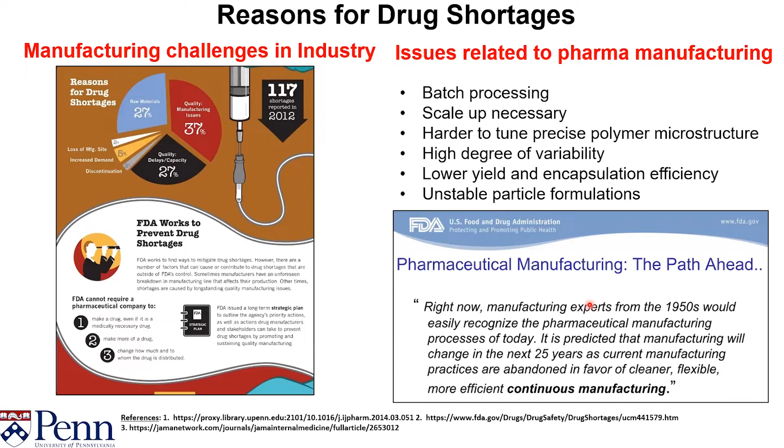In many cases, when drugs are produced, they're produced based on emulsion-based manufacturing processes. So emulsion, as you know, is a mixture of two immiscible fluids, such as oil and water. When you mix them, you get an emulsion, such as oil in water or water in oil emulsions. These emulsions can then be processed into particles, which can be used as injectables as well as vaccines.

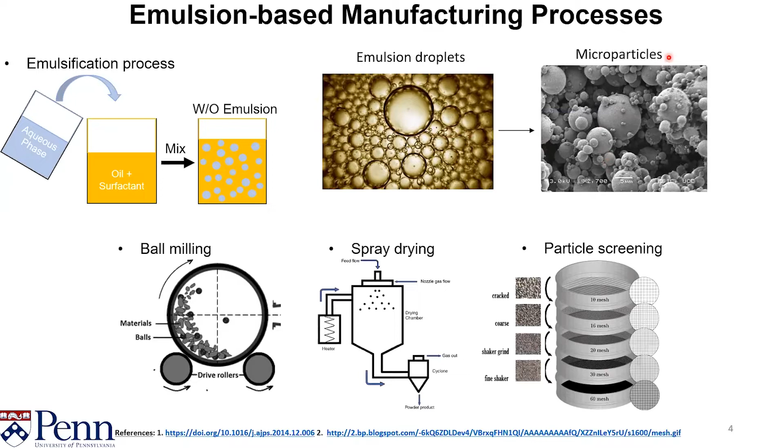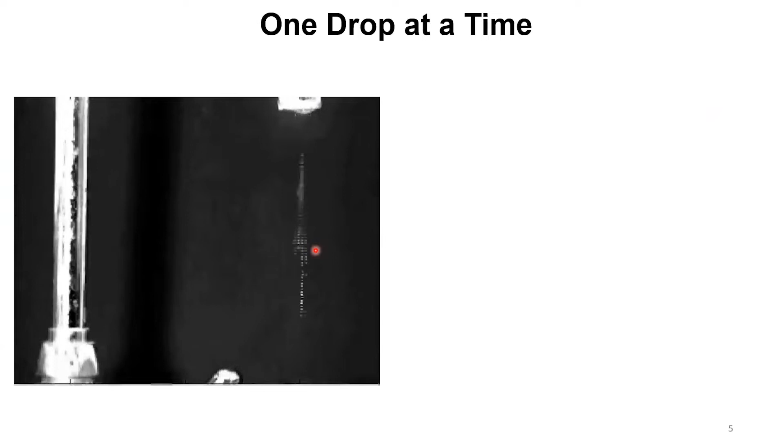Now, traditional methods of creating these particles using emulsions end up giving particles that are extremely heterogeneous, as you can see in this electron micrograph. So we and others have been working on making drug particles that are highly, highly uniform and homogeneous. And we get our inspiration from this right here. This is a leaky faucet.

What you see here is that every time a droplet grows, at some point, it will detach from this tap. And the reason for that is that as the droplet grows, it gains weight. And when it gains sufficient weight, gravity pulls it down. And this intricate balance between the gravitational force and surface tension leads to droplets that are always of the same size. And we do exactly the same thing, but at smaller scale.

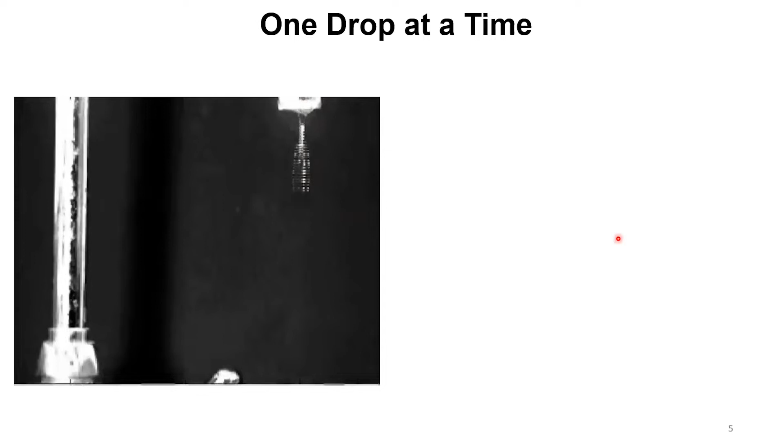So we create these channels that have dimensions of sub-millimeter. They're typically tens of micron. And we can now create these droplets one at a time. So here what you see is this is a tapered capillary sitting in another capillary. We have oil that is flowing through this gray area and water that flows around this gray capillary. And the oil gets detached and broken up into these droplets.

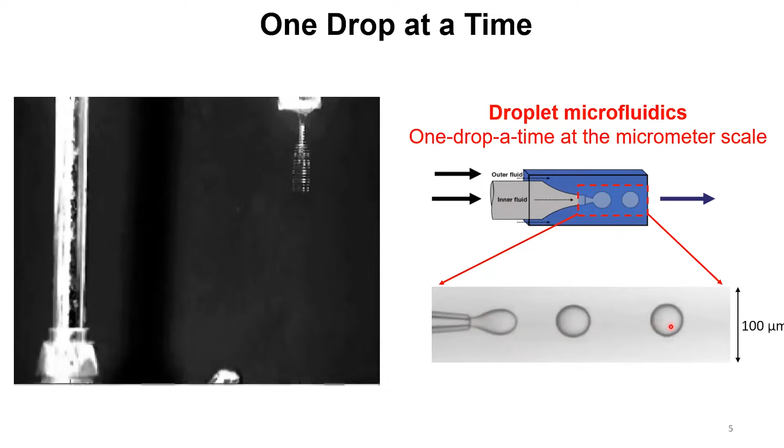Okay. So what's really unique about this droplet microfluidics is because you can control the flow of fluids precisely, you can create droplets of exact same size and also different morphologies. So people have been able to make these Janus type droplets.

Okay, I'm having some computer issue here again. So let me see if this is going to be okay. I'm very sorry about the computer issues that I'm having here. Okay. Okay, I hope you can still see my screen.

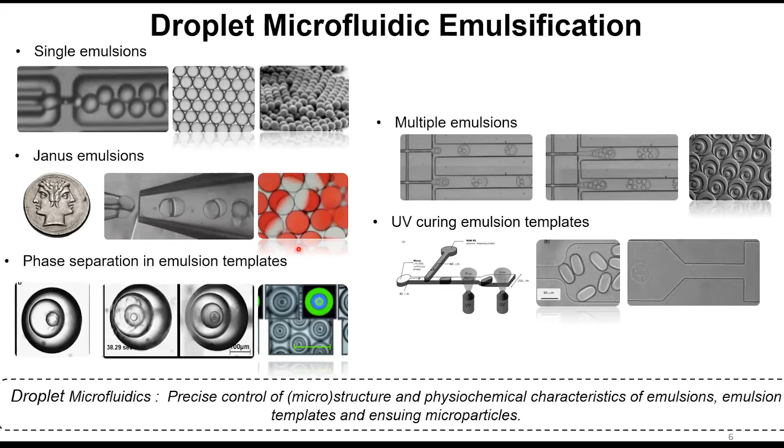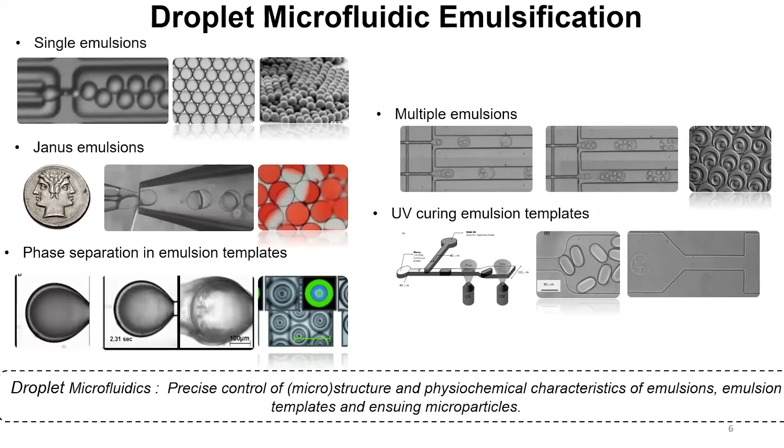So again, just going back to the droplet microfluidics, this droplet microfluidics gives tremendous control over the size as well as morphology of droplets. And the field has really taken off. So these days you'll find tens of papers that are published every week on using droplet microfluidics to create beautiful droplets that get used as templates for particle synthesis.

Now, there's a huge problem though. The production rate in microfluidics is extremely low. If you're doing 1 milliliter per hour, you're doing pretty good, okay? Whereas in industry, you typically need much, much larger scale. So if you are producing droplets at 1 milliliter per hour scale, to get 100 liters, you need 11 years. And no industry is going to use a technology that does not have the scale-up capability.

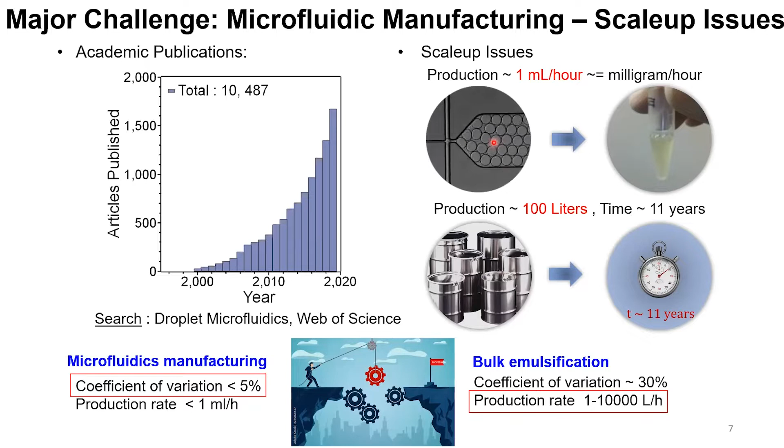So while the droplet microfluidics gives you the high uniformity and precision, it lacks the production rate that is required by the industry. So there's this gap between what is being studied in the laboratory and what the industry needs. And this is exactly what I wanted to address. Now, one simple question is, if the flow rate is so low, why don't you just increase the flow rate, right, to get to a higher production rate? And this is the problem, okay?

So if you operate at high flow rate, what happens is that you undergo this instability and you induce jetting of the stream. So instead of creating these beautiful droplets one at a time, you induce jetting. And by inducing jetting, you no longer have the capability to create these highly uniform droplets. While I won't go into the detail, the reason that increasing the flow rate induces jetting is because the shear force essentially overcomes the surface tension force, or inertial force of this dispersed phase overcomes the surface tension, leading to this jetting phenomena. So simply increasing the flow rate is not going to solve this problem.

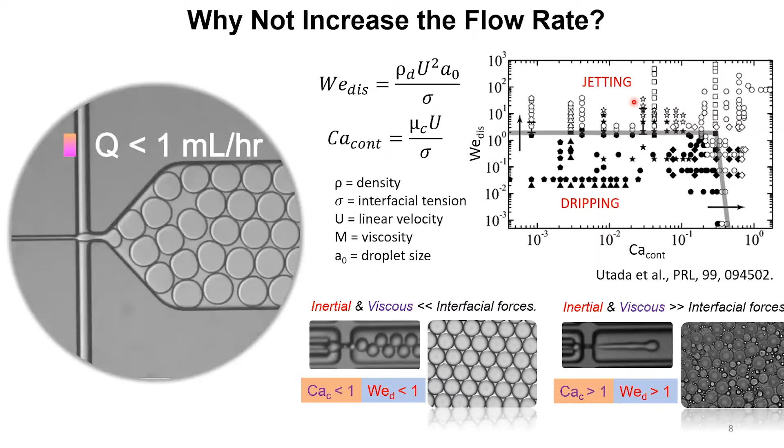So one simple way to scale up is to have many droplet generators work in parallel at the same time, right? So instead of having just one droplet generator, you can have 12, you can have 100, you can have 1,000 droplet generators. Problem with that is that each droplet generator will need some kind of liquid handling units, such as pumps. So if you have 1,000 droplet generators, you're going to need 2,000 pumps. And that's not a very viable way to enable scale up.

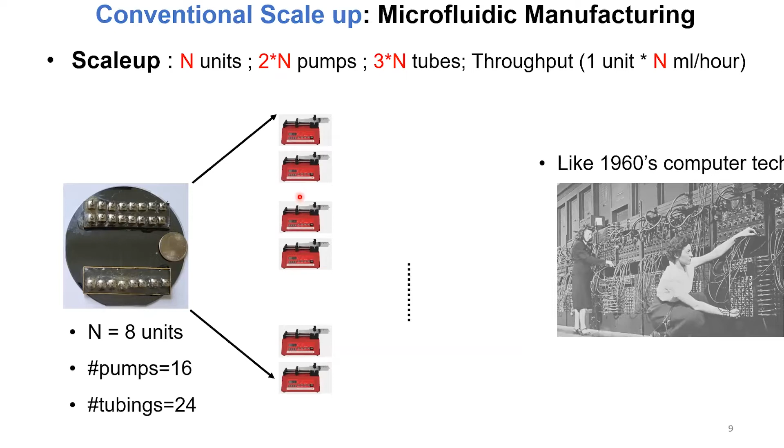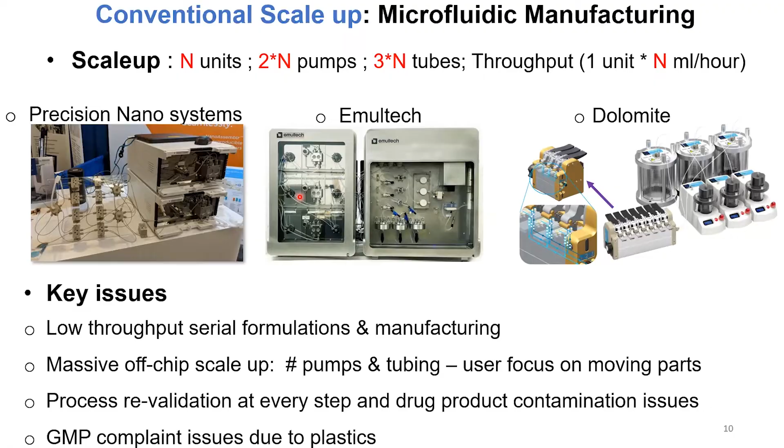Okay, but that's what a lot of companies are doing right now. There are actually several companies in this area that are trying to scale up microfluidic technology. The issue with this again is that because you're just scaling up by increasing the number of droplet generators, you need an equal number of liquid handling units, and there's variability from droplet generator to droplet generator. Okay, so we thought about this problem a lot, and we actually are very inspired by what happened in the microelectronics industry. Okay, so Korea is a very powerful nation in this domain, right?

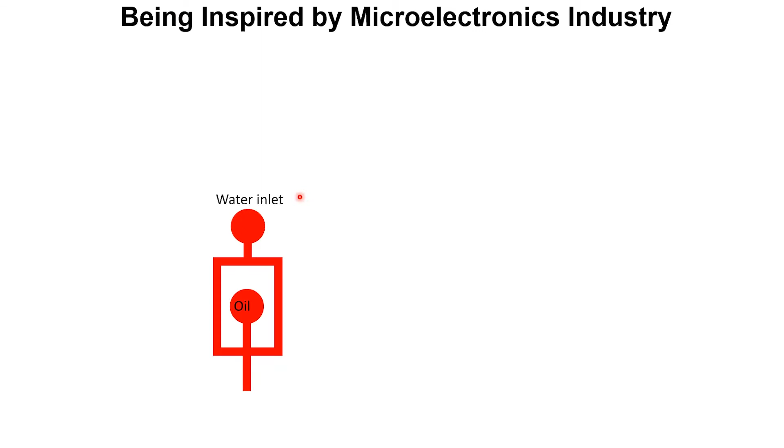Microelectronics is nothing but taking transistors. Okay, so this is a transistor that was actually first developed at Bell Labs, 1940s. And to go from here to these semiconductor chips that we have in all of our phones and computers, what needs to happen is that number one, these transistors need to be miniaturized, and then they need to be parallelized onto a single chip.

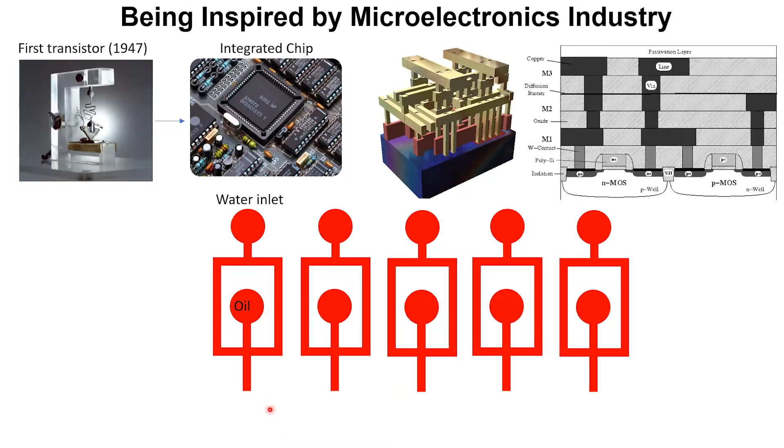Now, when this parallelization is done, it's done in a way that there's a single channel or conduit circuit that brings in electrons and takes out electrons. You don't increase the number of inputs and outputs linearly. So we basically take a similar approach where we have a droplet generator like this, and we parallelize it onto a single chip, and we connect these two delivery channels that will bring in water and oil.

And these droplet generators are all connected in parallel to each other, and they will generate droplets one at a time, and these generated droplets will be collected in this green collection channel. So that's the basic strategy. We are inspired by how the microelectronics industry was able to parallelize these transistors to create these semiconductor chips. We want to do exactly the same thing. Instead of controlling the flow of electrons, we are now controlling the flow of liquids.

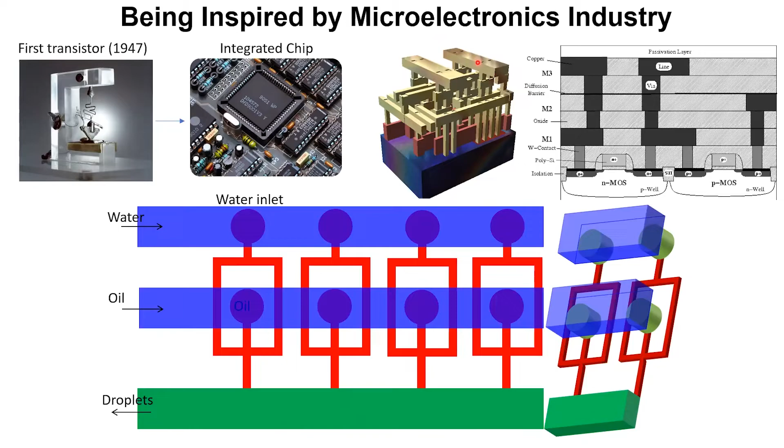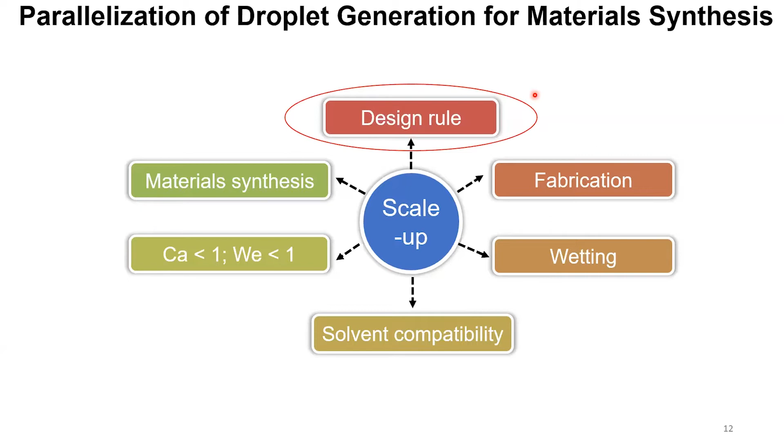All right, so basically to enable scale up by parallelization, there are several things that we have to consider. And I want to walk through this process step by step with you to show you how we were able to achieve parallelization and what the status of the field is right now. So the first thing that I want to share with you is, how do you design these parallelized devices? So I don't know how many of you work with droplet microfluidics. Maybe none of you do.

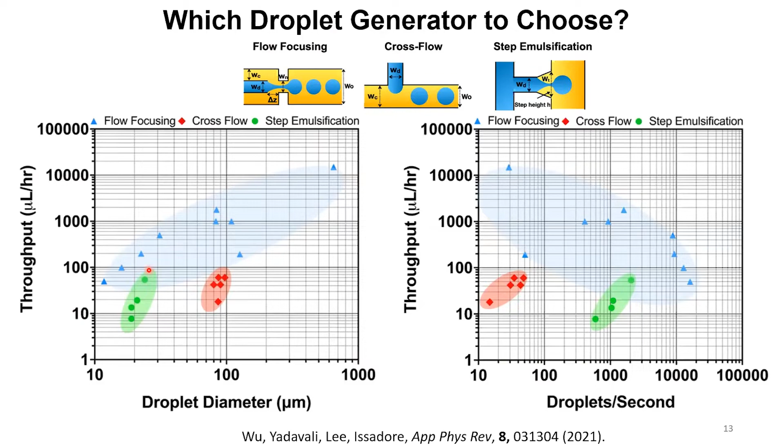But there are different ways of generating droplets in microfluidic chips. There are different droplet generator geometries, such as flow focusing, cross flow, step emulsification. Each geometry has its own advantages and disadvantages. What we decided to do is we decided to use this flow focusing geometry because, as you can see in these two plots, where I'm plotting the throughput per device as a function of droplet diameter, or how many drops one can produce per second, the flow focusing device gives the widest range of operation. So it gives the biggest flexibility in terms of producing droplets of different sizes, as well as different throughputs, okay?

And then now we have to parallelize droplet generators, okay? And there are two different schemes by which these droplet generators can be parallelized. So I want you to think about this, okay? One strategy is called tree network. So the liquid goes in and then it branches off into two channels, and there are multiple branching points. So it's called tree network. The other geometry that we consider is called ladder network. It looks like a ladder, right? So you've got two fluid streams that are coming in, and then there are these droplet generators that are connected to these two delivery channels.

Now, which design do you think offers more advantage in enabling parallelization? Now, the important thing about this is that every single droplet generator has to be fed with the exact same flow rates to be able to produce uniform droplets. So I'm going to tell you that it's actually the right-hand side that we decided to use. The reason for that is the left-hand side is very intuitive, right? Every time branching happens, you divide the fluid into two equal channels. The problem with this tree network design is that if there is a problem with one device, it completely throws off the balance among all the connected droplet generators.

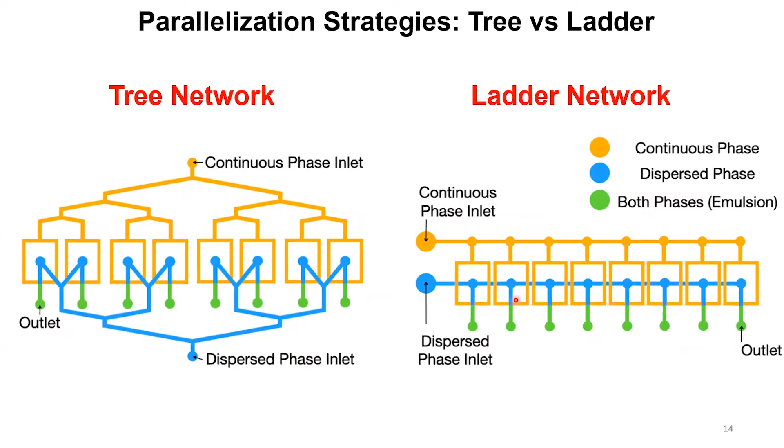Now, then how do you ensure that in this ladder network every droplet generator is being fed at the same flow rate? It actually becomes a very simple circuitry problem. So like I said, instead of controlling the flow of electrons, we are controlling the flow of fluids. But in the end, they have exact same physics behind them. So let's say this is a delivery channel. So this channel brings in water. And let's say these rungs of the ladder, so these vertical lines, each of them is a droplet generator.

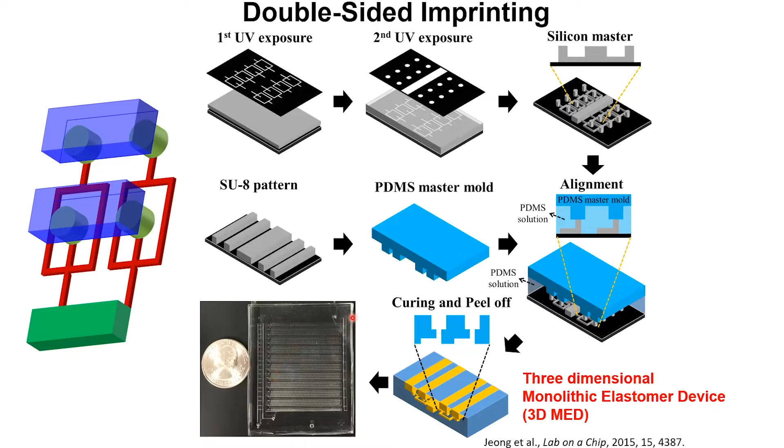So this device, which is about the size of a US quarter, approximately the size of a 500 won coin in Korea, has 1,000 droplet generators, and this is what they look like. So this is the flow focusing device that makes the droplet, and this is the big distribution channel that has very low resistance to the fluid. So the water and oil come through these big delivery channels from outside, and they're delivered to the flow focusing channel using these vias. These things are called vias. And this is what this device looks like when it's under operation.

So let me see if I can play this movie. All right, so what you'll see is that these droplet generators, 1,000 of them, are all working in parallel. And we're moving around in the device to show that they're actually working very nicely. And if we look at what this looks like, this is the production rate that we see in real time. So using this device, we can create approximately 4 liters of droplets per hour, which is tremendous.

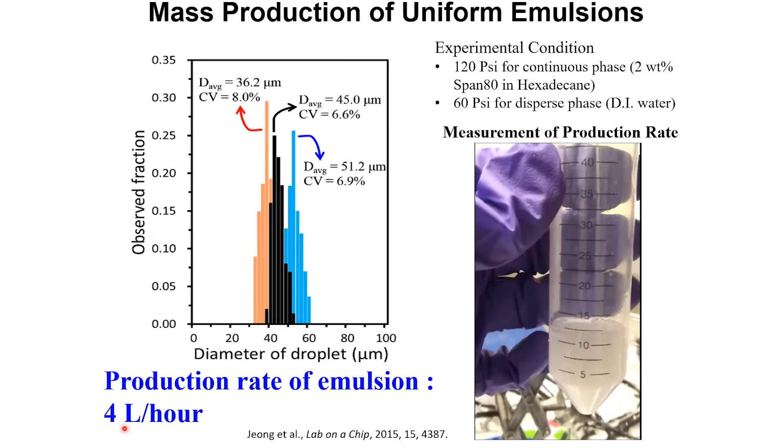All right, so I've talked about the design rule and fabrication. For making these droplets and particles, it's important that we use solvents such as chloroform and dichloromethane. These are common solvents that are used in the pharmaceutical industry. Also, it's very important to control the wetting within these devices. Depending on what kind of droplets you want to generate, you may need a hydrophobic device versus a hydrophilic device. So instead of using polydimethylsiloxane, which is a very versatile elastomer to make microfluidic devices, we decided to use this perfluoropolyether polymer. This is essentially liquid Teflon, so it's highly solvent compatible.

And as I said, to be able to control the wetting properties of this device, we co-polymerize this liquid Teflon with polyethylene glycol diacrylate, so PEGDA. This PEGDA is very hydrophilic. This liquid Teflon is extremely hydrophobic. So by controlling the ratio of these two polymers, we can control the wetting properties of these elastomers. So it can go from very hydrophobic to fairly hydrophilic.

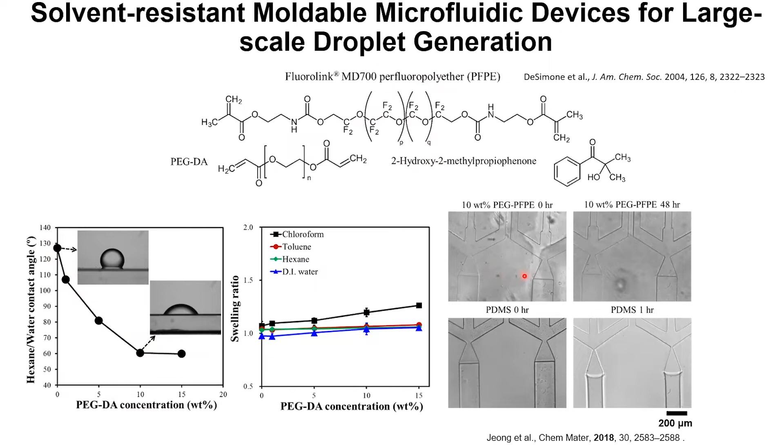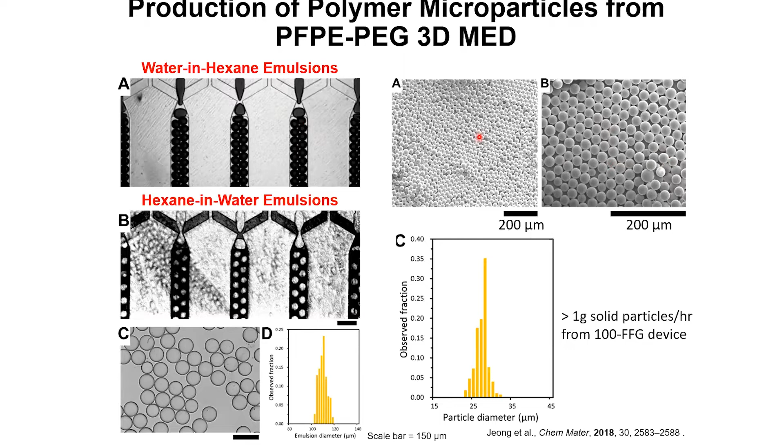And what's great about these devices is that you can pump in any kind of organic solvent, and because of the solvent compatibility of this liquid Teflon, these devices don't deform and they operate beautifully. So here what you see is that we can now create water-in-hexane or hexane-in-water emulsions, depending on whether we have a hydrophobic device or hydrophilic device. And by enabling the production of these droplets using organic solvent, we can make polymeric particles that have high uniformity. All right, so I've talked about the design rule, as well as how these devices can be fabricated and how wetting and solvent compatibility can be controlled.

Now, what I want to talk about is fabrication and the solvent compatibility issue again. So what I've shown you is that we can create these devices using this stamping technique, this soft lithography replica molding technique. This is great, but it's not necessarily the best way to produce a manufacturing platform.

So what we've decided to do is, again, we are very, very motivated by the microelectronics industry. As the microelectronics industry has done beautifully, we do fabrication directly into a silicon wafer. This is a 4-inch silicon wafer, and we now incorporate thousands of droplet generators onto a single chip.

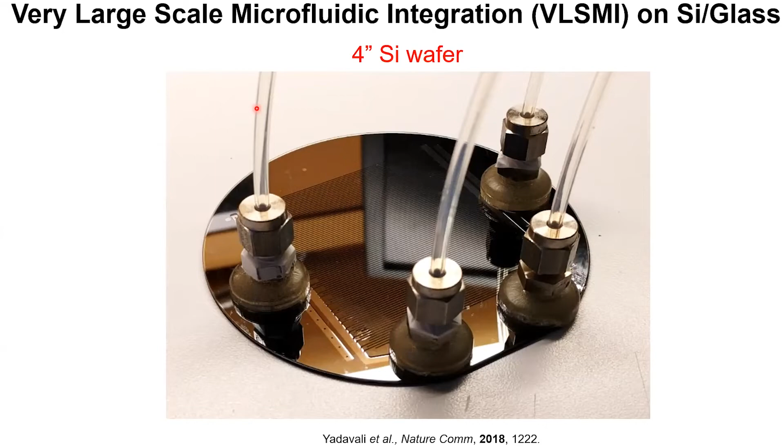And again, using the same design rule that I discussed about 5 minutes ago, we can now have a single set of inlets. So this one is for oil, this one is for water, and these two are the outlets where the generated droplets now exit the device. This, again, takes advantage of the fabrication technology that the microelectronics industry has developed.

The microelectronics industry can now go down to sub 10 nanometer scale. We don't need that scale, obviously. What we do is we use their technique to create channels that are on the order of tens of microns, which is more than sufficient for us.

Now, what we've realized is that in order to create these droplets, what I told you in the beginning is that it's not a good idea to increase the flow rate because you induce jetting. But you obviously want to increase the flow rate, right? So what we found out is that we can create these fluidic resistors right before the droplet generators.

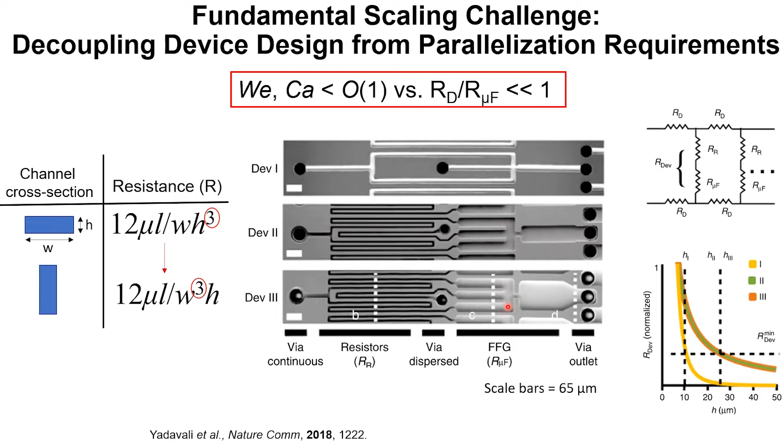So we are decoupling the fluidic resistance by putting in these fluidic resistors, and we are decoupling the fluid resistance requirement from the droplet generation requirement. So by doing this, we can actually operate at a fairly high flow rate without inducing jetting, while keeping the resistance of each droplet generator fairly high.

So you can see here, device 1 does not have any fluidic resistors, whereas devices 2 and 3 do have these fluidic resistors. And as you can see, we can maintain this dripping regime where we generate these beautiful droplets one at a time until a fairly high flow rate for each device. This means that you can push droplet generation at a high rate for each device. At the same time, you can put many of these devices in parallel onto a single chip.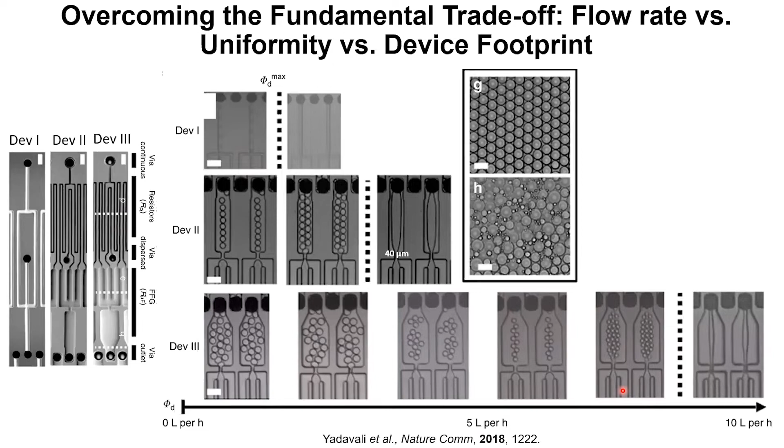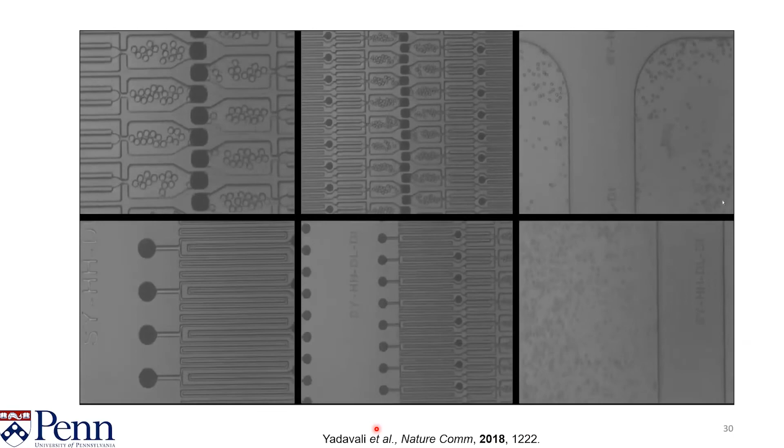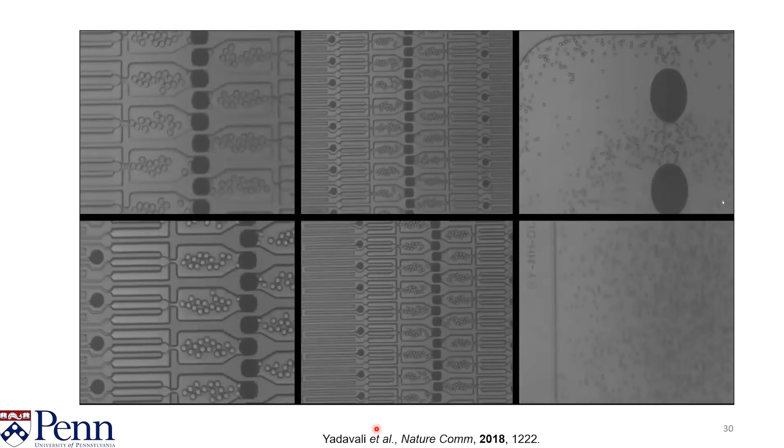So using this approach, we've been able to incorporate 10,000 droplet generators onto a single 4-inch wafer. And as you can see in these videos, where we are scanning over different regions, we are producing perfectly uniform monodispersed droplets in these devices. And now we've gone up to 20,000 droplet generators, further optimizing the device geometry.

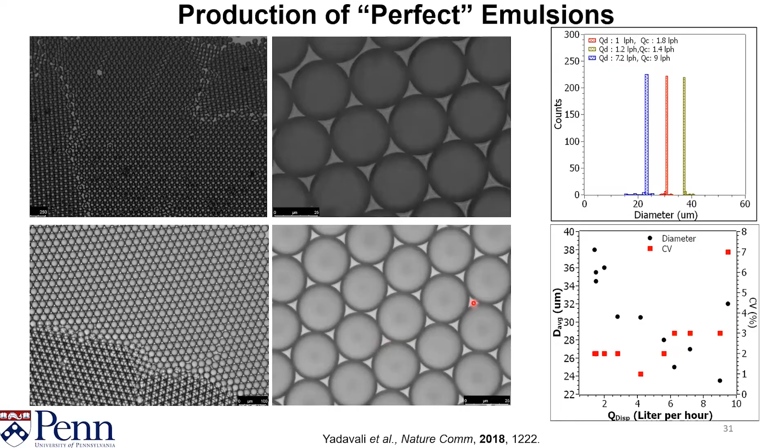What's great about this lithography technique is that because the lithography is so precise, the droplets are extremely, extremely uniform. In fact, we can't even detect the variability in these droplets, as you can see on this slide. So I just wanted to show you what the droplet generation looks like in real time. So let me see if I can play this movie.

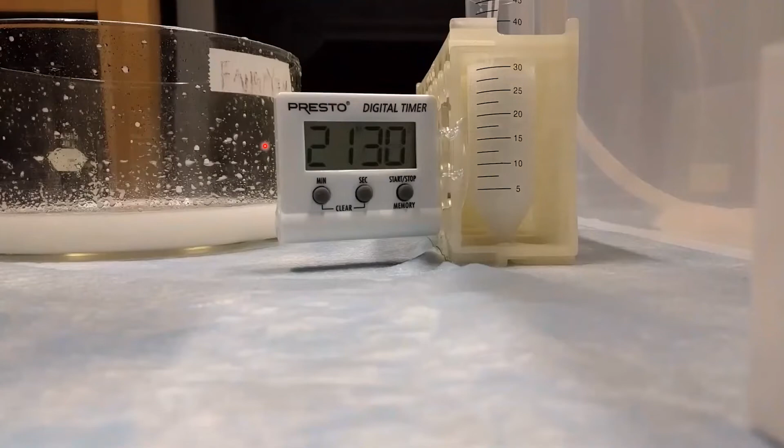You can see that the production rate is extremely, extremely high, and every single droplet that gets produced is exactly the same. So with this setup, we can now easily go above 10 liters per hour production rate, which is tremendous. And this is in line with what the pharmaceutical industry needs for continuous production and manufacturing of particles for injectables and vaccines.

Okay, I'll come back to the question a little bit later.

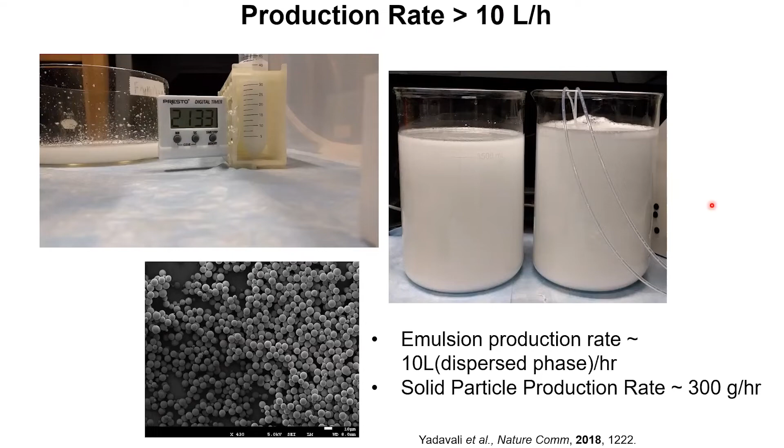So as I was saying, we have further optimized our devices by using this trench design. So we have the big delivery channel that delivers the liquid, and then we've got the droplet generators sitting on the first floor, and there are these vias. But what we found is that when we try to make these vias, we often end up breaking our devices.

So we modified our fabrication technique so that we have this little trench dug in, and that helps with the integrity of these devices. So our fabrication becomes more reliable using this approach. So using this approach, like I was saying, we can now pack more than 20,000 droplet generators onto a single chip.

All right, so I've covered many different aspects of droplet generation. But in the end, what we want to do is make materials, right? We want to make these particles that can be used as injectables and so forth. So making droplets is not sufficient. What you often have to do is take those droplets and process them so that they become solid particles.

Now, the traditional way that people have done this in droplet microfluidics is that they produce these perfect droplets, and then they collect the droplets and use bulk emulsion processing techniques to create solid particles.

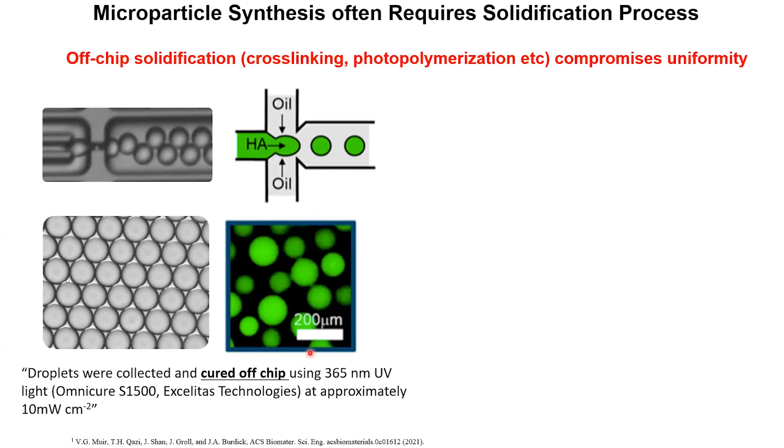And when you do that, oftentimes what you end up doing is you compromise the uniformity of the droplets, okay? Because you're using, again, a bulk method to do the processing. So what we wanted to see is if we can do on-chip processing of the droplets to induce solidification on chip, so that when the fluids come out of the device, we actually have solid particles.

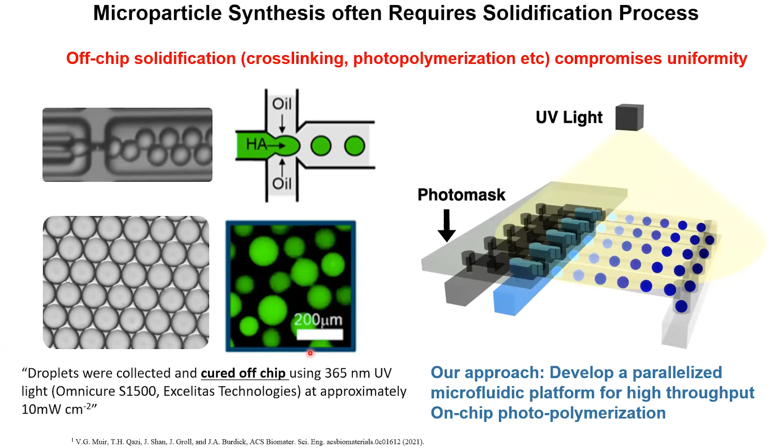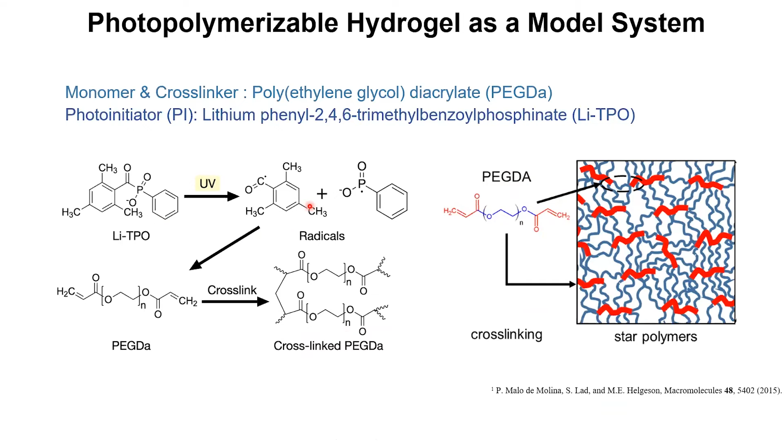So one method that we studied is to solidify these droplets as soon as they're generated in the device on chip using photopolymerization. In this case, we decided to use hydrogel particles because hydrogel particles, as many of you know, have a lot of utilities. So we take this polyethylene glycol diacrylate. It's got this polyethylene unit connected to two diacrylates. And we use this photoinitiator called LAP photoinitiator, which has fairly fast kinetics. And we induce photopolymerization on chip.

What we had to figure out is, what is the residence time of the droplet under the UV to induce solidification? And this is important to find because we want to make sure that we induce solidification. But obviously, if this becomes too long, that means the footprint of each droplet generator is too big, which will reduce the number of droplet generators that we can parallelize onto a single chip. So we found out that, for this particular formulation, we needed approximately 60 milliseconds or longer to induce solidification or gelation of this precursor.

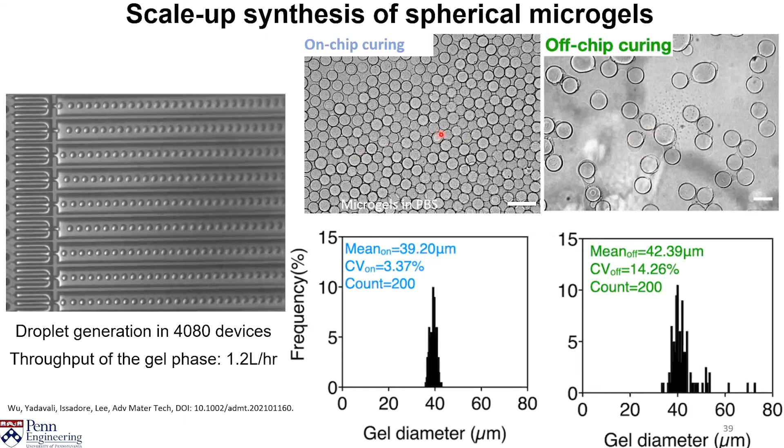So again, using the exact same parallelization technique that I described, we now parallelize these droplet generators, and we then induce photopolymerization right upon droplet generation to induce the gelation. And as you can see, when these gels are cured or polymerized on chip, the hydrogels that we collect retain the original uniformity of the droplets. Whereas if you try to do the curing off chip, you often run into this issue where you have lost the uniformity that you originally had when the droplets are generated. So this gives tremendous advantage in retaining the uniformity and the precision that microfluidics allows.

Now, something that we wondered and realized is that you need to irradiate UV for a certain period. But what if we change the time the droplet spends being irradiated by the UV? In other words, what if we change the time of UV radiation or photo cross-linking? And we can do this simply by changing the flow rate. And what we wondered is, can we change the mechanical properties of these hydrogels?

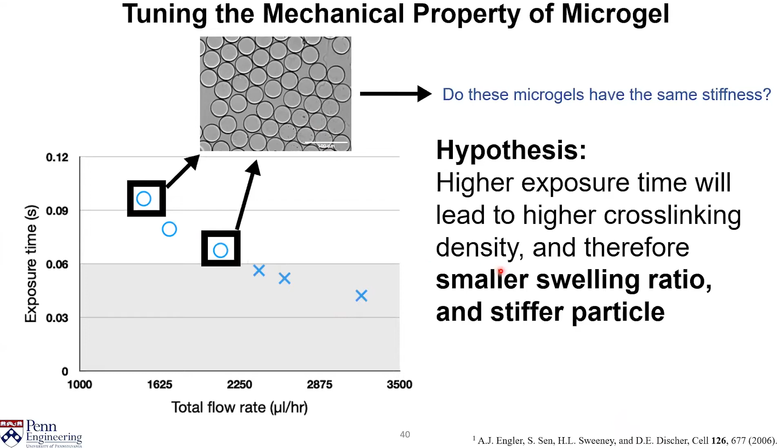Because as many of you know, mechanical properties of hydrogels can impact what happens when they're injected or when they're interacting with the cell. My colleague here, Dennis Discher, has shown that by controlling the stiffness of hydrogel, it is possible to affect the differentiation of stem cells into different lineages. So our hypothesis was by controlling the irradiation time, we can control the mechanical property. And as I said, studies have shown that the mechanical property of hydrogel is the key factor that determines the fate of cells that are interacting with them.

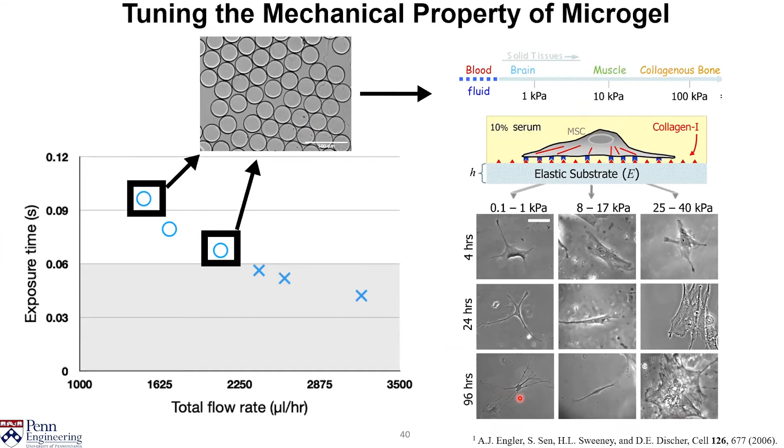So in order to measure the mechanical properties of hydrogel, we had to come up with a method to characterize their stiffness. And there's this really nice paper that was published by Dave Weitz about 10 years ago, where they push hydrogel into this tapered channel. And by analyzing the shape of the hydrogel being pushed into this taper, and relating that to the pressure being exerted, it is possible to estimate both the compressive modulus as well as shear modulus.

And as you can see, as we increase the exposure time, the time these droplets spend under UV radiation, the modulus can be controlled from hundreds of pascals to a few kilopascals. And this is the perfect range for hydrogels to be used for different biomedical applications.

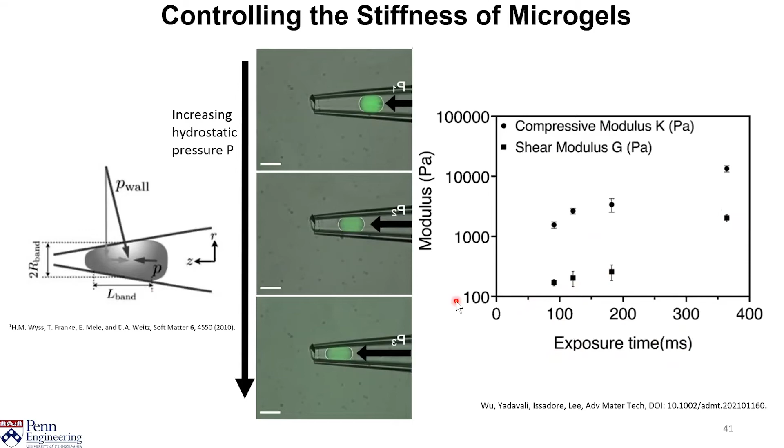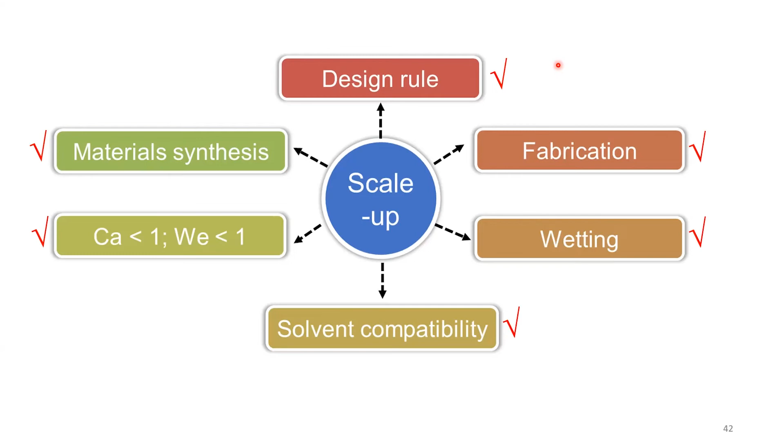Now, there's no reason for us not to go to even bigger wafers, such as 12-inch wafers, which is what Samsung uses to make all the semiconductor chips. The reason that we stopped at 4-inch wafers is because these are the facilities that we have at our university, at the University of Pennsylvania.

We are very excited about this development. So along with my colleague Dave Issadore and Sagar Yadavali, who used to be our joint postdoc, we've launched a startup, Infini Fluidics, and this company is actually doing quite well.

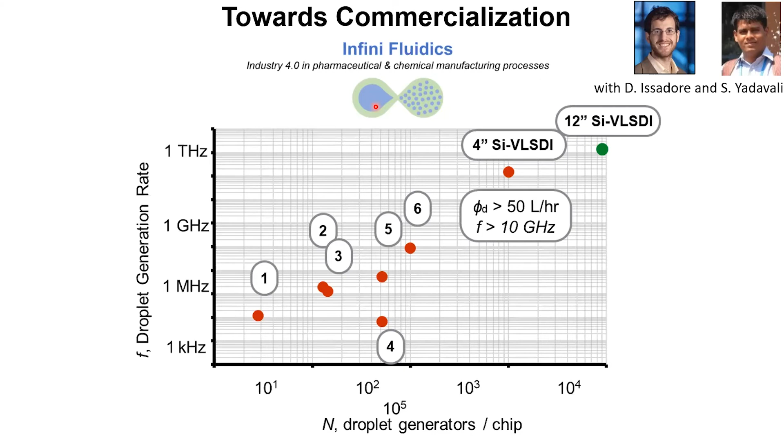Okay, so what does this mean right now? We have this 4-inch chip that can generate droplets at tens of liters per hour scale. Is that something relevant for the industry? So we did a little case study here, and I'd like to share this with you. So there's this anti-retroviral therapy that has been developed for people that are living with HIV. Okay, and these are injectables. So these are made in forms of particles.

And we basically did a back of envelope calculation to see how many chips do we need to run in order to meet the world's demand for this particular drug, because it's a growing market. And what we found is that if we operate 100 of our 10K chips, so each 4-inch chip has 10,000 droplet generators, and if we operate 100 of these, we can meet the world demand for this particular drug.

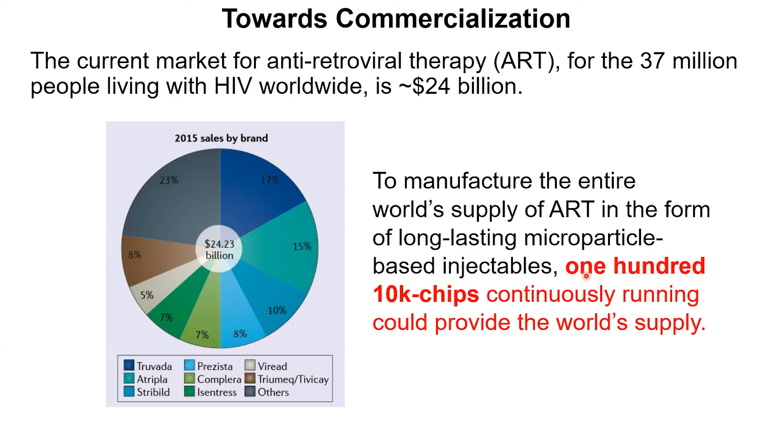And it's not inconceivable that hundreds of chips are being operated simultaneously at a plant that would make these types of drugs. So we are already at the scale where industry can take our technology and start manufacturing their drug products. There's another very unique advantage of our parallelization technique. What you saw is that we can put many of these devices where each device is generating the exact same droplet.

Now, as many of you know, when drugs are developed, they go through different trials and phase studies. So initially you start with preclinical, laboratory scale with cells and small animals, and then they go through these different phase studies. We saw this with mRNA vaccine as well. Now, what happens in the pharmaceutical industry is that for each phase and stage of development, you have to have a new way of producing drug products, okay? And that incurs a lot of cost and time associated with developing a process that will create sufficient amount of materials for each phase of the study.

Whereas in our case, we just have to tune the number of droplet generators that would get incorporated into a single chip. So from preclinical trial all the way to the market scale, the basic droplet generation unit is exactly the same. So there's no need to develop a completely new process to create these drug particles. All we have to do is just change the number of droplet generators that are parallelized on a single chip, and a single platform can address the entire process of drug discovery as well as manufacturing, which I think is really exciting.

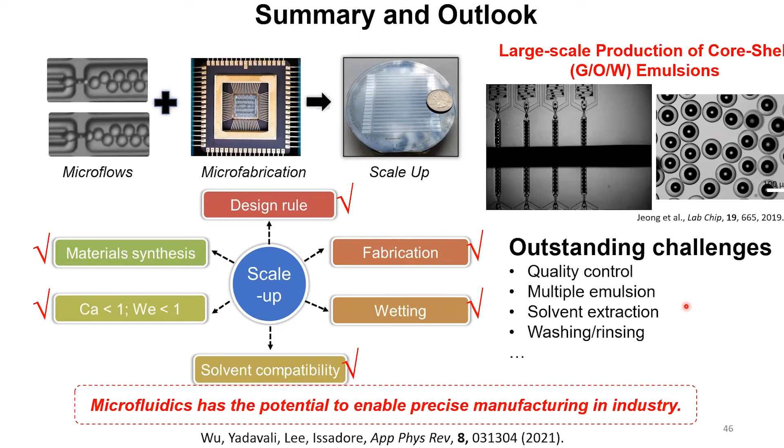We are now expanding our scale-up efforts into these more complex emulsion droplets. So in this case, what you see is these compound bubbles where you have gas surrounded by oil dispersed in water. And we are very hopeful that these types of particles can be used in different types of pharmaceutical manufacturing. So I hope that I was able to convince you that microfluidics is not just for the lab scale. We can actually take this and use it for manufacturing in the pharmaceutical industry.

So with that, I'd like to thank again the people who worked on the project. So Sagar Yadavali, as I said, was a joint postdoc between myself and Dave. So he's now the CEO of this company, Infini Fluidics. Hun Ho was another postdoc that we jointly advised. He's now a professor at Jeonnam National University. Alex is a PhD student that's finishing up. And of course, I'd like to thank our funding agencies.